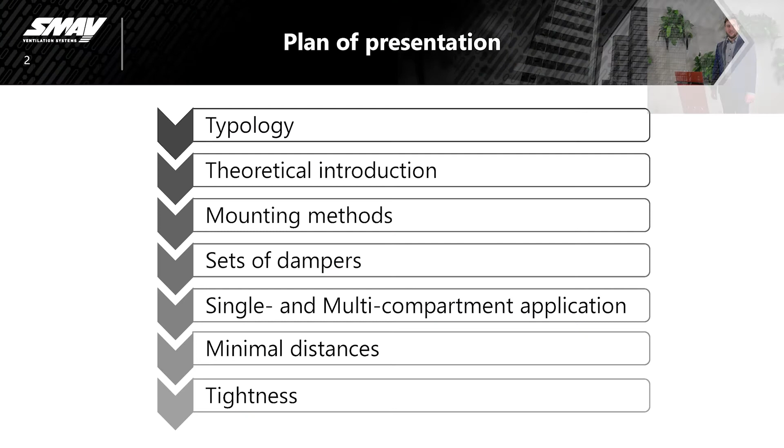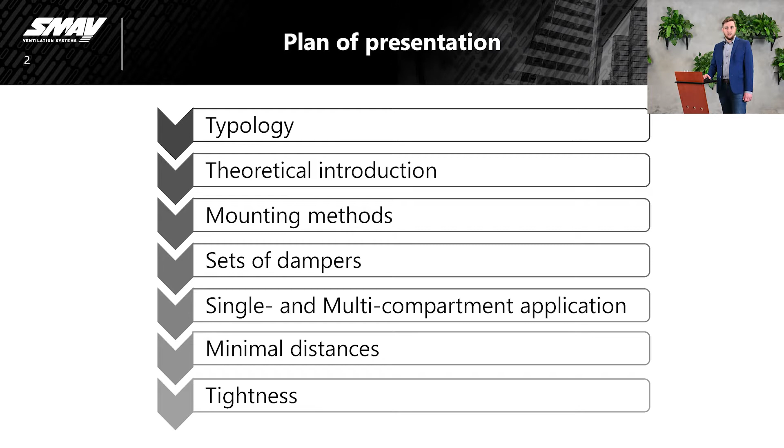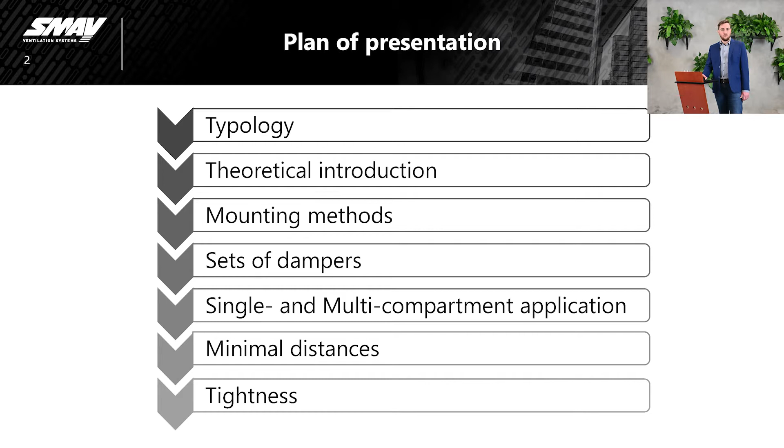I would like to begin by introducing you to the agenda for today's webinar. At the beginning of our meeting, I would like to tell you about the typology of fire dampers. I will tell you about the difference between cut-off fire dampers and smoke control dampers and show you some of our products. Then I will go into the theoretical introduction, so I will talk about documents, standards and fire classification. After that, I will show you mounting methods of Smay fire dampers in different partition types. The next thing I would like to discuss is our sets of fire dampers called battery of dampers. We have certified damper connection solutions, which are incredibly useful for large airflows. I will also raise the subject of application of fire dampers in single or multi-fire compartment systems. After that, I will say some words about minimal distance according to European standard EN 1366 Part 2 and about tightness of fire dampers. At the end, I will show you some of the most common design and mounting mistakes.

Fire protection devices can be divided into two groups: cut-off fire dampers, which are intended for use in household ventilation installations, and smoke control dampers, which are intended for fire ventilation systems. They differ not only in the application, but also in the construction. Cut-off fire dampers intended for HVAC systems are equipped with a thermal release, which will close the damper automatically if the surrounding temperature reaches 72 degrees Celsius. They are designed to protect openings in fire separation walls to stop the fire from spreading. They can also be equipped with actuators and be closed based on FAS system control.

In contrast, dampers for fire ventilation, called smoke control dampers, do not have a thermal release because they are designed to be controlled exclusively by an external fire protection system via a two-way actuator. They can be used to exhaust smoke or provide compensating air during a fire, and their open or closed state depends on the fire scenario.

In our offer we have two types of round cut-off fire dampers, KTM and KTSO, which differ in dimensional range, and rectangular cut-off fire dampers and smoke control dampers. Rectangular dampers for both purposes are available in two versions, one blade KWP and multi-blade WKP.

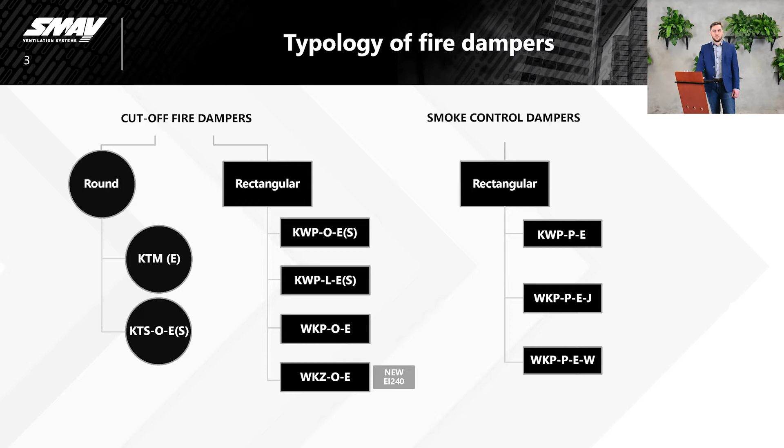Now I would like to say something about the regulations that our fire protection devices are tested according to. The cut-off fire dampers for HVAC systems are regulated and tested according to three standards. EN 1366 Part 2 describes the test method. EN 15650 is the harmonized standard which contains the requirements for this product group and which is the basis for CE marking. And EN 13501 Part 3 specifies classification requirements.

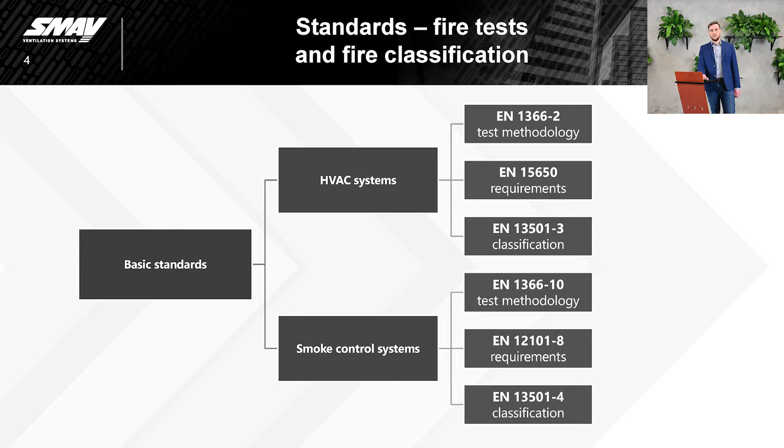Smoke dampers are part of smoke control systems, which are regulated by three standards. EN 1366 Part 10 contains the test methodology and also refers to EN 1366 Part 2, which means that smoke control dampers must meet the same requirements as fire dampers. EN 12101 Part 8 is a harmonized standard for smoke control dampers, in which requirements for this group of products can be found, and thanks to that they can be marked with the CE symbol. And EN 13501 Part 4 specifies classification requirements.

Speaking of classification, on this slideshow we can see examples of fire classifications of two of our products. Based on this, I would like to describe step by step what each symbol stands for.

First of all, letter E stands for fire integrity. It is the ability to resist exposure to fire and not allow it to get to the other side of the material. Letter I stands for insulation, the ability to stop temperature transfer through a fire damper. 120 is the time given in minutes during which the parameters are met.

v_ew means that the damper can be installed directly in the wall. h_ow means that the damper can be installed directly in the ceiling. Next is inside-outside, which means that the criteria are fulfilled no matter from which side the fire acts on the damper.

Letter S means smoke leakage, which is the ability of an element to reduce or eliminate the flow of smoke from one side to the other. 1500 is the value of the under pressure during the test, given in pascals.

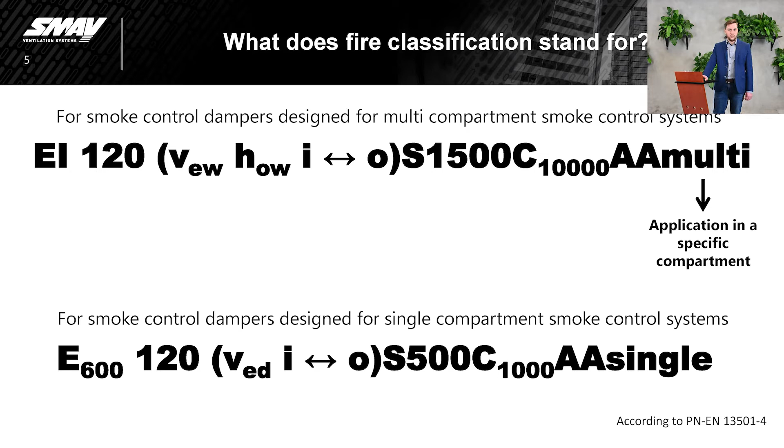Fire classification is quite shorter; it ends on the S parameter. Fire protection devices are tested in 300 pascals of under pressure, and the test involves 300 cycles, but it can also be 1000 cycles.

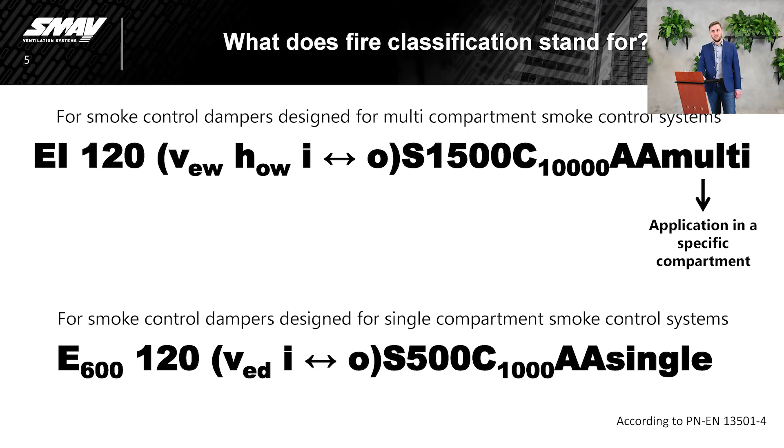In the next few slides, I'd like to show you several possible installation methods of our products. Please note that the specific information about mounting methods for each damper is available on our website in datasheets and installation manuals.

Generally, all fire dampers are intended to be installed in walls and ceilings. However, it is possible to install a fire damper at some distance from the wall. According to the European standard, the maximum distance between a fire damper and partition is 1 meter. Approval for mounting the damper in this configuration must be preceded by an additional test confirming it meets the fire resistance requirements. I will show you an example of such installation later on.

Our company also offers sets of fire dampers called batteries of fire dampers, which are designed for ventilation openings with area over 1.5 square meters. We have products designed for HVAC systems up to 6 square meters and for smoke removal up to 10 square meters. I will talk about them in a later part.

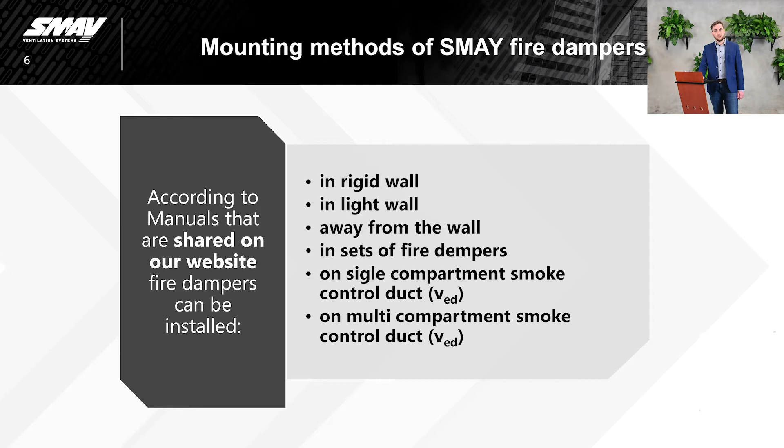We have also products that are intended for use on either single or multi-compartment smoke control ducts. We want to show you several installation methods and also present our products. For this reason, each example includes a different damper for a different method.

First example is KWPO, cut-off fire damper, located in rigid wall. This product is certified for 120 minutes fire resistance when installed in walls which thickness is 115 millimeters or more. This installation method is sealed by using cement, mortar, cement and lime, or concrete. On the right, the technical drawing that can be found in our documents shows the dimensions of the opening prepared in the wall.

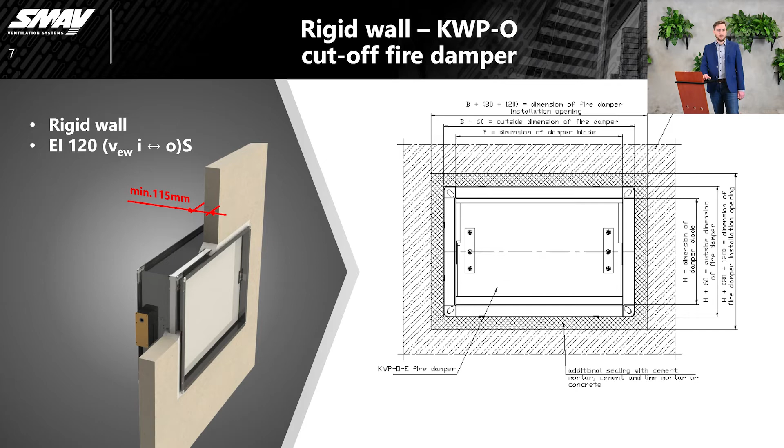Here we have the scheme of the installation of WKPO in rigid wall. Because of its construction, the driving system is localized directly on axis of rotation. It is covered by a special casing that provides easy access for service by protecting the actuator during nominal operating time. The multi-blade fire dampers have non-standard dimensions because of additional 130 mm for actuator casing.

So there are two options to prepare the opening. It can be a customized opening for exact shape or a slightly larger rectangular opening. In the second case, the space below and above the actuator, shown in orange in the drawing, should be filled with the same material that the wall is made of.

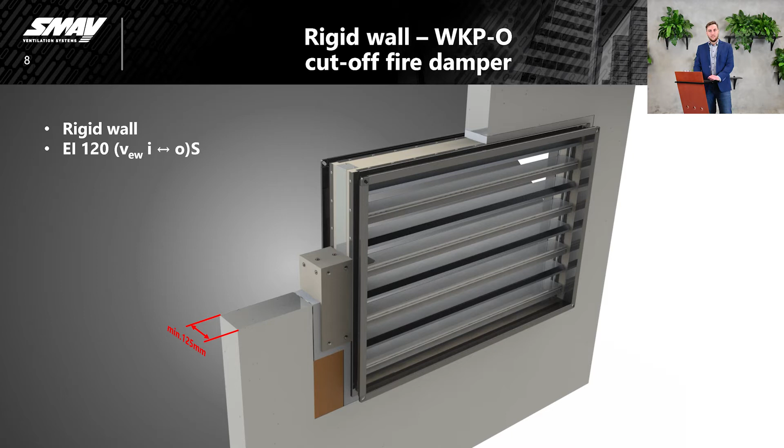WKPO fire damper is certified for 2 hours in walls which thickness is 125 mm or more. This installation method is carried by using mortar. Here we can see the smallest dimensions of WKP smoke control damper, which is 200 by 200 mm. As you can see, the actuator casing is bigger than the damper's external dimensions, but the procedure of installation is exactly the same as in the previous example. Opening can be customized as on the drawing or a rectangular one.

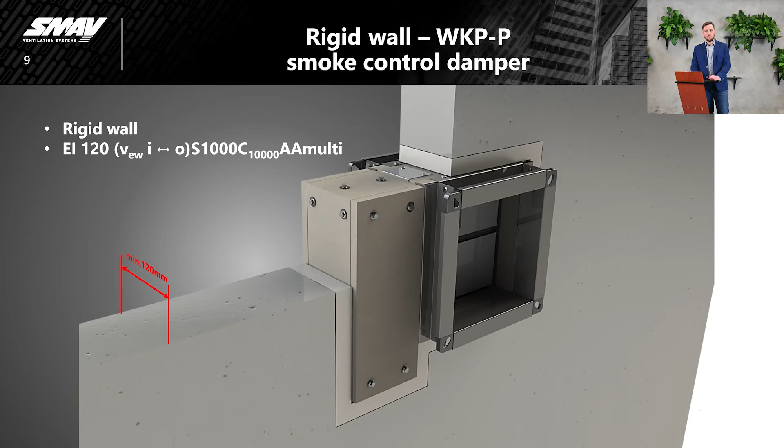Installation method of KTM cut-off fire dampers in light wall. It is really important to properly prepare the wall for this kind of installation. The opening should be matched to the size of the damper according to the guidelines provided in the manual. As you can see in the visualization, steel profiles must be used around the opening to make it stronger and make sure that the fire damper doesn't fall down during a fire.

The opening is additionally covered by 2 layers of gypsum boards, and then the damper is installed on high-density mineral wool. That opening is closed on each side by a flange of 15 mm gypsum board. The wall thickness must meet the requirements of fire resistance class 120 minutes according to EN 1363 Part 1. This standard determines the thickness of steel profiles and the gypsum boards, amount of their layers, and also density of mineral wool to reach the same class of the wall as prepared for fire test.

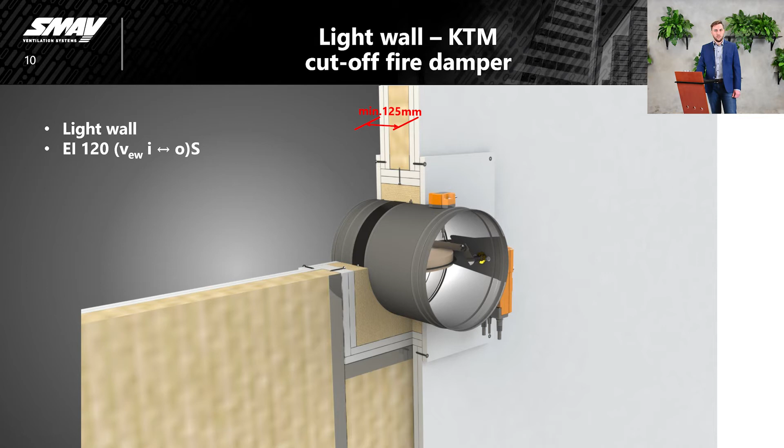Next one is installation method of WKP smoke control damper in light wall. Wall construction is made by the same procedure as the previous one, and there is no possibility to make a customized opening for this case, so it has to stay rectangular, and free spaces should be filled with mineral wool.

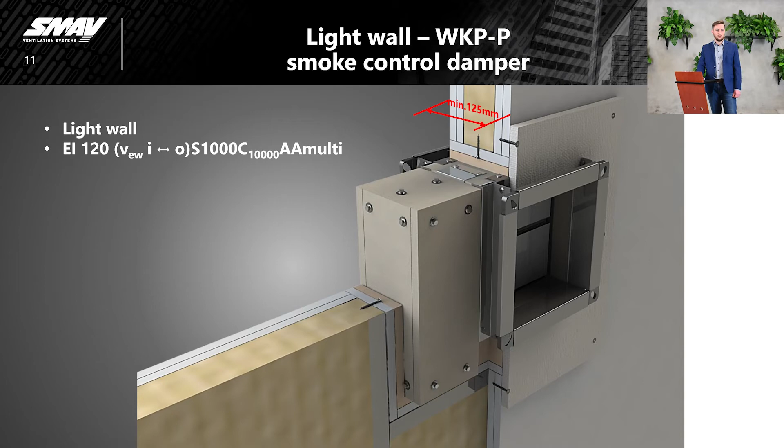Installation method of KWPP smoke control dampers in ceiling. This method is quite similar to installation in rigid wall, but additionally we recommend using supporters that hold the damper until mortar hardens. As you can see, the minimum thickness of ceiling is 150 mm, and the fire resistance class of KWPP is 120 minutes.

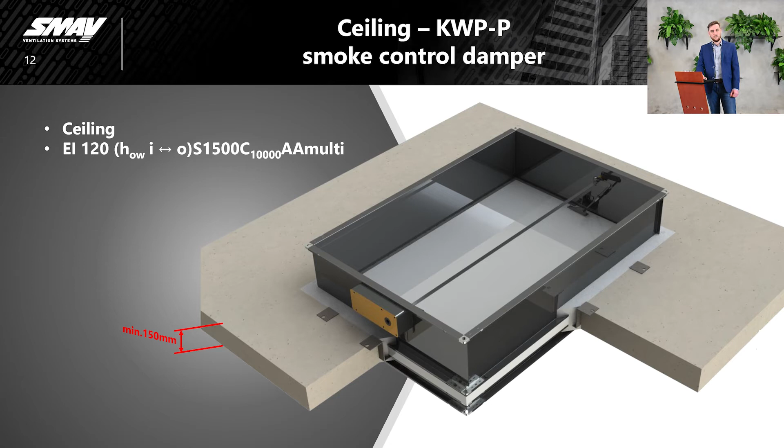Installation method of KWPL cut-off fire dampers beyond a rigid wall. This installation is made in ProMat technology. The part of installation that is between the fire damper and rigid wall is made as a multi-compartment smoke control duct. More details you can find in installation methods shared on our website.

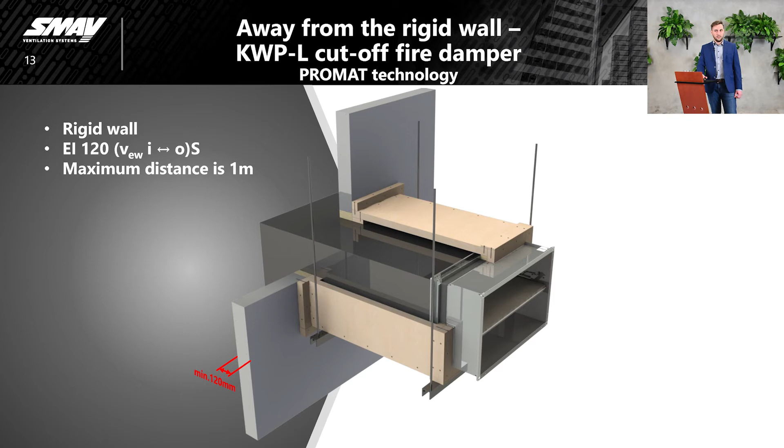One more thing, I would like to emphasize that the steel ventilation duct cannot be a standard HVAC duct. It must be a duct intended for use in a single compartment smoke control duct.

Installation method of KTS fire dampers beyond the rigid wall. In this case, we recommend using wool as insulation material because it is needed to use material that can bend over the duct. For this type of fire dampers, fire classification depends on installation method. As you can see, at a distance of 1 meter from the rigid wall, they have a classification of 90 minutes, while the KTS mounted directly in the rigid wall has a classification of 120 minutes.

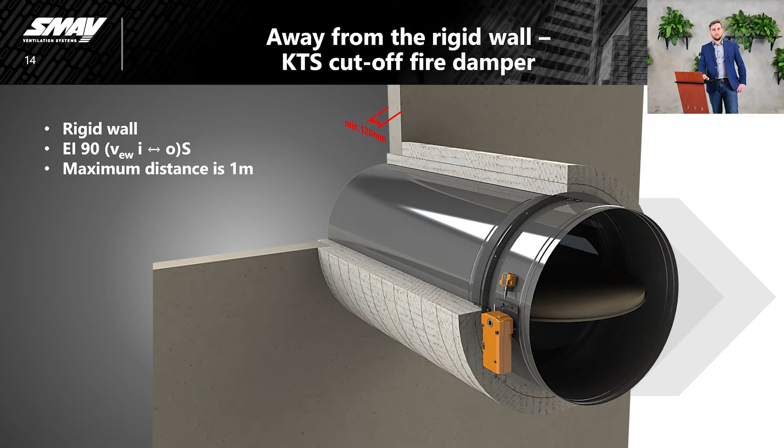Installation method of KWP-P smoke control dampers on single compartment smoke control duct. The VED indication in the classification code for single compartment systems means the product is intended for use in a duct that goes through vertical partitions. It doesn't specify exactly where fire dampers should be installed. As you can see, it can be at the end of the duct or even on top of the duct, mounted either vertically or horizontally in this case.

Installation method of KWP-P fire dampers on single compartment smoke control duct. This type of damper is intended for use in multi-compartment smoke control duct, but it is also acceptable to use it on single compartment smoke control duct, because multi is a higher class than single.

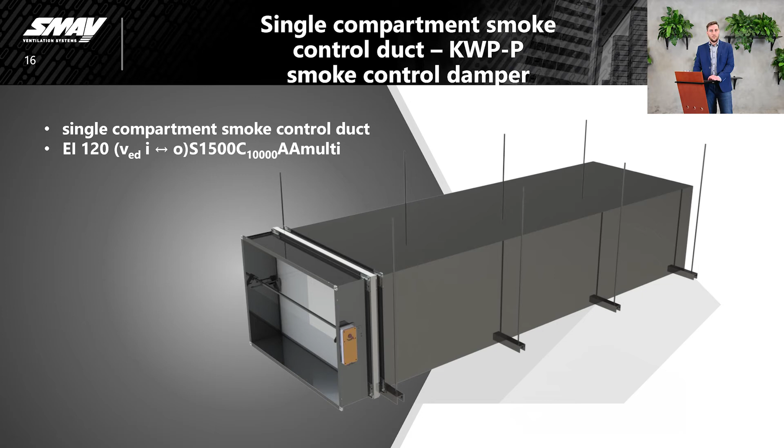Here we can see the installation method of KWP-P fire dampers on multi-compartment smoke control duct. There is a significant difference compared to single compartment smoke control duct. According to EN 13501 Part 4, VED indication in multi-compartment systems means the orientation of the smoke control damper. As you can see in these two examples, the direction of the duct doesn't matter — in both cases, the fire damper is installed vertically.

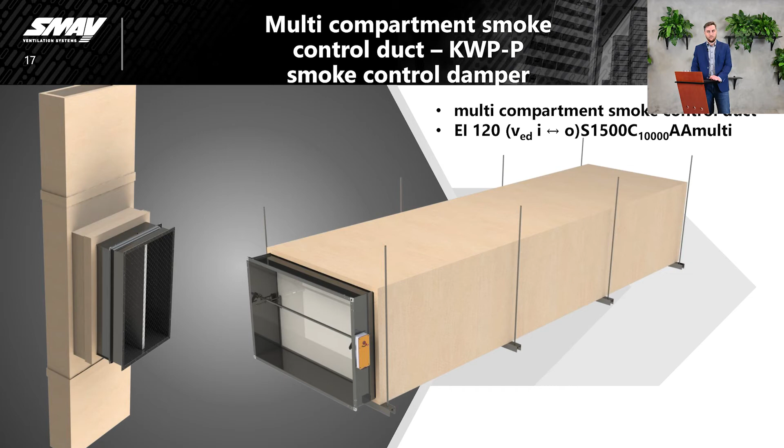As I mentioned before, our company also offers sets of fire dampers, intended for ventilation openings with an area over 1.5 square meters. Sets of KWP-O cut-off fire dampers intended for HVAC systems are certified according to a harmonized standard, with a maximum area of 6 square meters. Batteries of KWP-P for fire ventilation systems have a separate document called National Technical Assessment, which allows us to place them on the market, with a maximum area of 10 square meters.

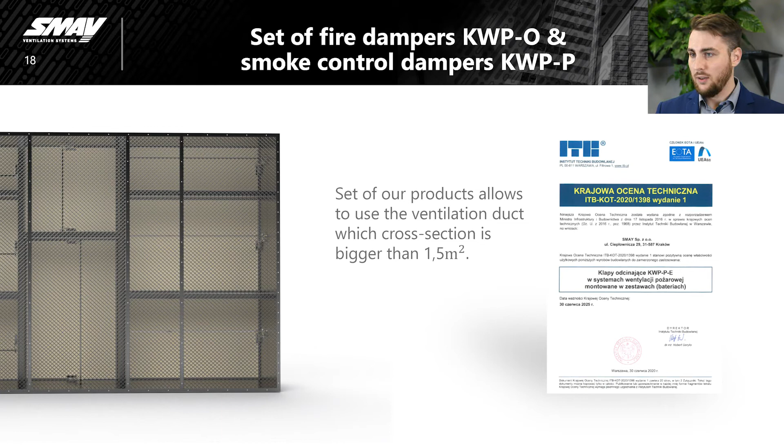How to properly specify a set of fire dampers? Basically, there are 3 steps we have to follow. Firstly, we have to define the type of damper, which depends on the system — as I said before, KWP-O are for HVAC systems and KWP-P are for smoke control systems. Secondly, we have to define the dimensions of the set. It is measured as the internal cross-section of the connection duct, so connection flanges are not taken into account.

The next step is to check if the wall type meets the requirements of the installation. It can be mounted only on a rigid wall or in a ventilation shaft, and should have appropriate thickness. All details are included in the installation manual in batteries.

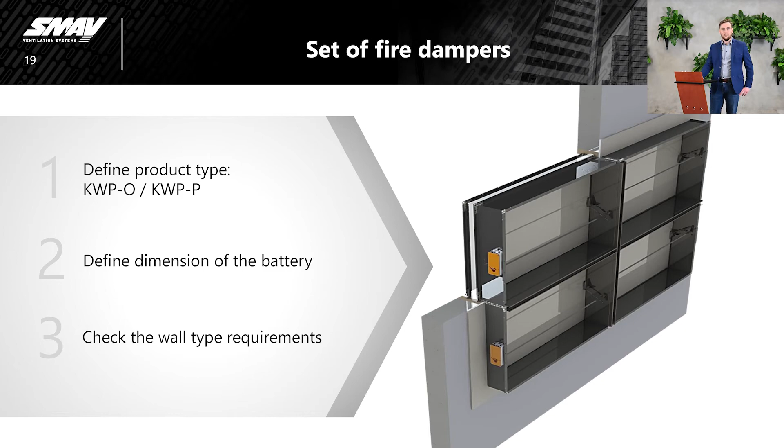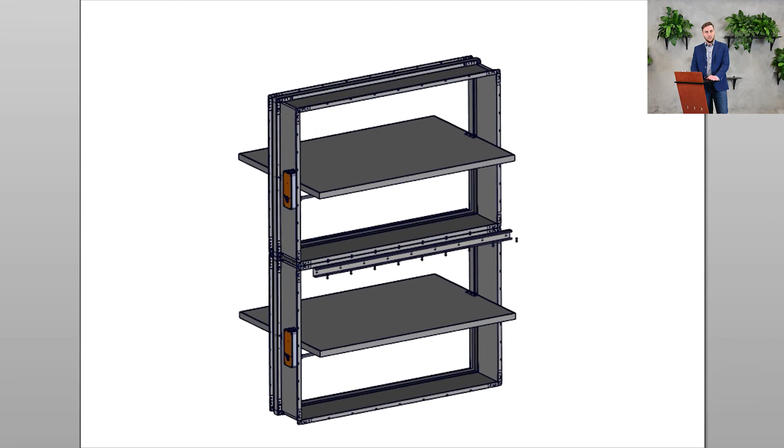Now I will show you a video demonstrating the proper way to install a fire damper set. It is very important that a set of dampers reaches the same parameters of fire integrity and fire insulation that are declared for fire dampers by the manufacturer. For this reason, connections between dampers must be sealed using mineral wool and an intumescent gasket, and also steel connectors that go onto the inside of the fire damper flanges.

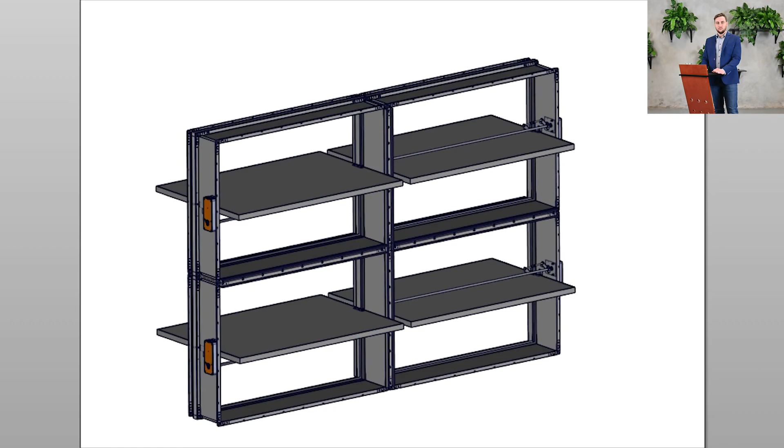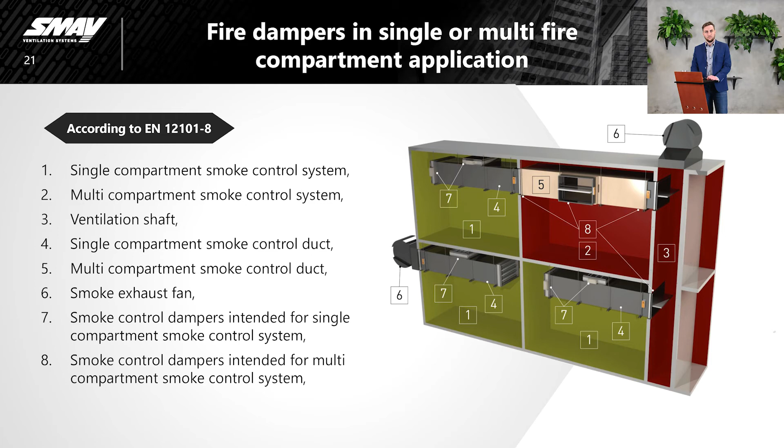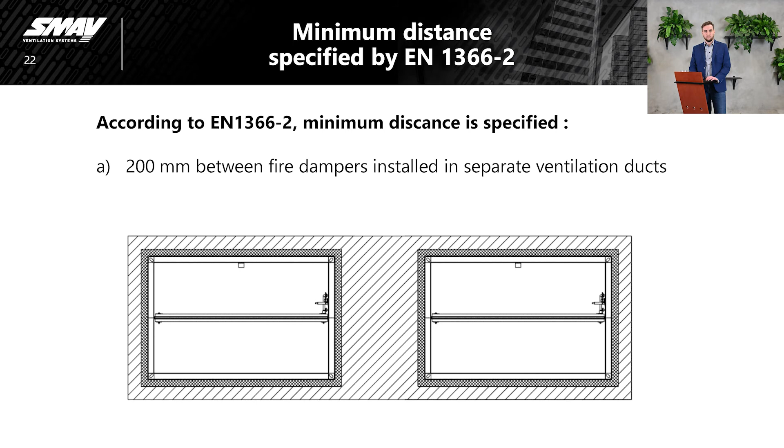The standard EN 1366 Part 2 specifies the procedure for a fire test and includes recommendations for use in practice in a building application. As a company that provides fire protection equipment, we get a lot of questions about minimum distances for our fire dampers. There is no difference between fire dampers in the market tested according to EN 1366 Part 2. The standard says the minimum distance between fire dampers for two separate ventilation systems should be 200 millimeters or more, and in the case of distance between a fire damper and building structure, it should be 75 millimeters or more.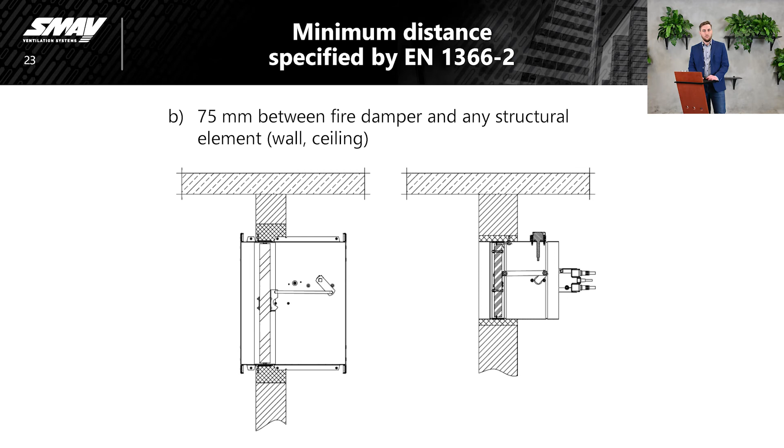Please remember these distances are established for safety, which includes proper installation of fire dampers and maintaining proper construction strength of the partition. There is a possibility to install fire dampers at a smaller distance than the standard specifies, but it has to be preceded by fire tests which approve the fire classification when a smaller distance is used. For example, our company provides KTM dampers which positively passed fire tests and can be installed at 10 millimeters between each other, and also 10 millimeters between the fire damper and building structure. But this is the only exception — distances between our other fire dampers are determined by the standard I mentioned before.

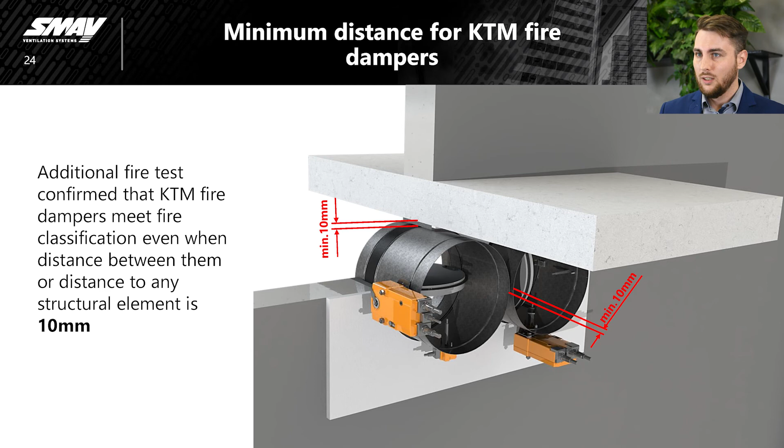Tightness of fire dampers is becoming a more and more popular topic. High tightness of dampers brings benefits by minimizing pressure losses in the ventilation system. In addition, the use of tight devices gives the possibility of operating at lower pressure, which allows reducing operating costs related to energy consumption.

The basic parameter that describes the tightness of the fire damper is the S parameter. Additionally, according to EN 1751, we can classify products in two separate parameters: casing tightness, which ranges from A to D, and shut-off tightness, with a range from 1 to 4. Casing tightness of our products is mostly declared as C. These parameters depend, of course, on the type of fire damper, their dimensions, and shape.

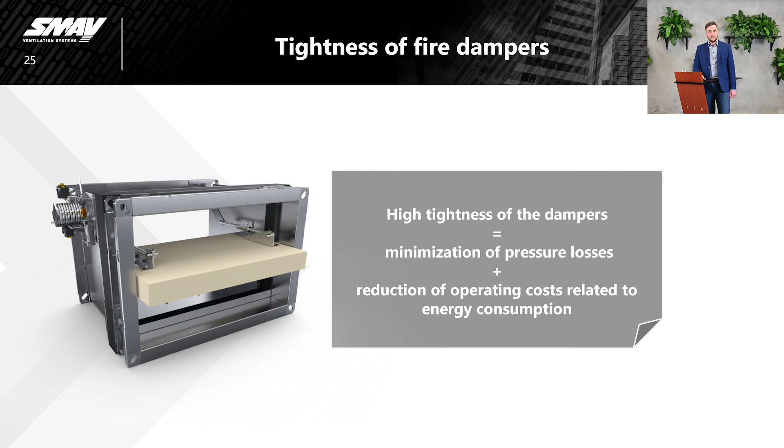We not only deliver fire protection equipment, but also provide technical and service support. Our experience over the years has shown that the design and installation of dampers causes several problems that keep repeating from time to time. I would like to point out the things you should pay attention to and explain why correct execution is so important.

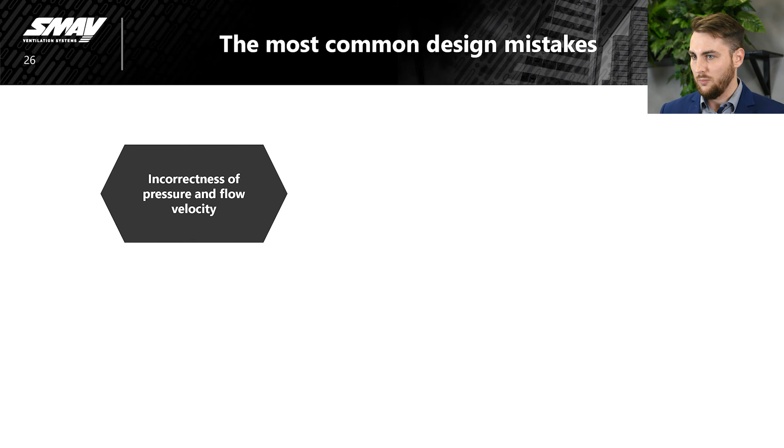First of all, inappropriate selection of damper for pressure and flow velocity of medium. I have mentioned before that cut-off fire dampers are tested at 300 pascals of under-pressure, while smoke control dampers are tested at 1500 pascals. We have to take this into consideration, because fire dampers for HVAC systems might not be able to meet requirements that come from smoke control systems. The next issue is velocity of the medium - it should stay below 10 meters per second.

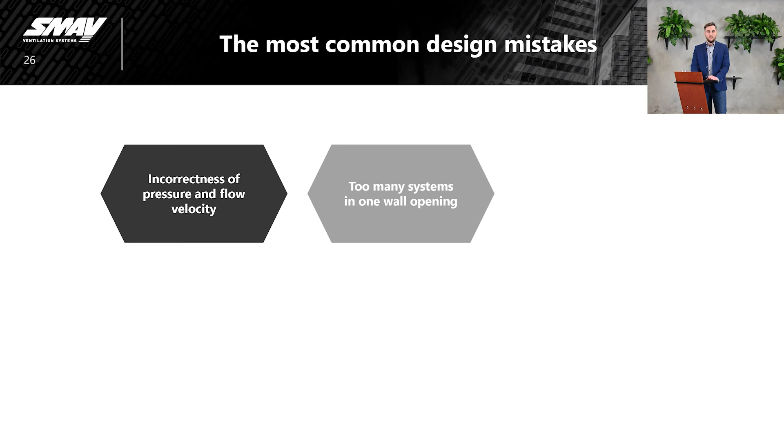Second issue is mounting too many installations in the wall opening. We are conscious that nowadays, due to safety and comfort, there are a lot of installations in building structures, and for this reason distances between them are decreased to a minimum to provide as much useful space as possible. Therefore, it is very common to make changes on site that are not included in the design. It is very important that the installation is physically done as designed, because not maintaining the proper distances may be a reason for not recognizing the classification of the fire damper.

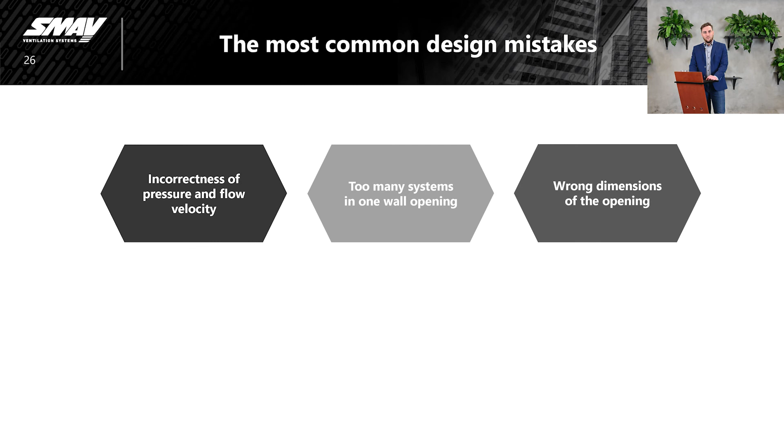The next thing is wrong dimensions of the opening. During installation, it is crucial to follow producer manuals. Otherwise, fire dampers might not meet requirements and their fire resistance can be different than declared. If the opening is too small, there is no problem to make it bigger to the right dimensions. If it is too big, you can fill the space, as we have shown talking about installation methods.

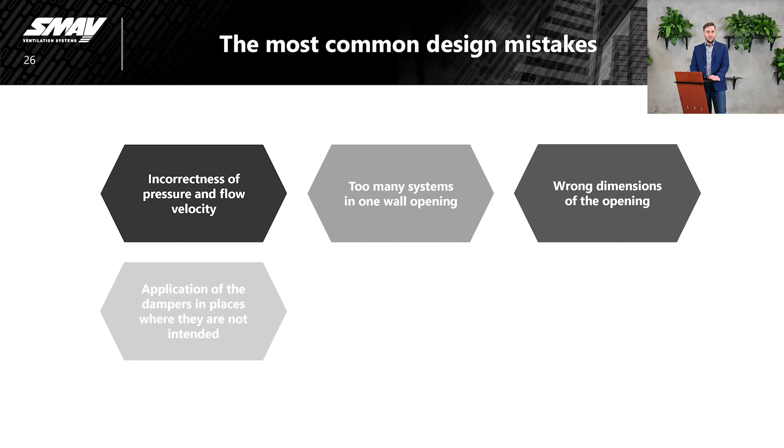Application of dampers in places where they are not intended for, for instance away from building partitions. Please remember that it is the designer's responsibility to verify if the fire damper can be installed in the way he or she wants. There are a lot of problems when a contractor or company realizes that the fire damper doesn't have the installation method and fire classification as it was designed.

Wrong selection of the damper for the system type which they are intended for. There are a lot of projects where KWPO cut-off fire dampers, which are intended for HVAC systems, are used in mixed systems, meaning day-by-day ventilation and smoke control systems simultaneously. In this kind of installation, the use of a KWPP smoke control damper is necessary. They are intended for smoke control systems, but as I mentioned before, they also have to meet the requirements set for cut-off fire dampers.

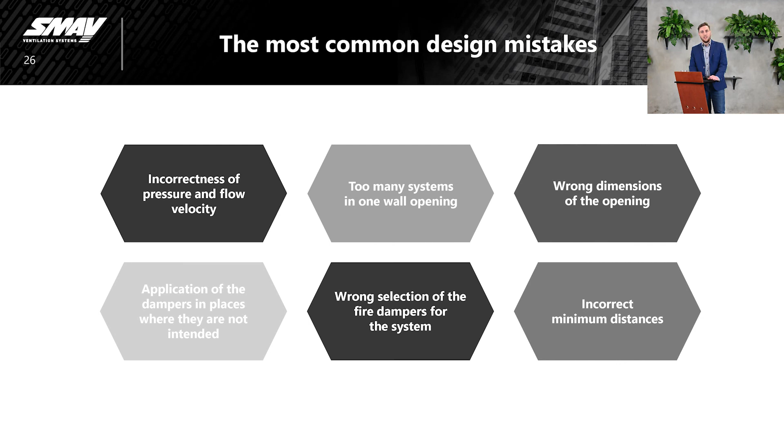And the last one: incorrect minimum distances. If we do not keep minimal distances during installation of fire dampers, they might not meet the requirements of the application, and their fire classification might be different than declared by the procedure.

In our documents, you will find recommended installation methods which have been confirmed by fire tests we have carried out. However, we are aware that the site situation may differ slightly from our drawings presented in the instructions. You can count on us and our fire testing experience. We share our ideas and advice because we believe there is always a way out of a difficult situation.

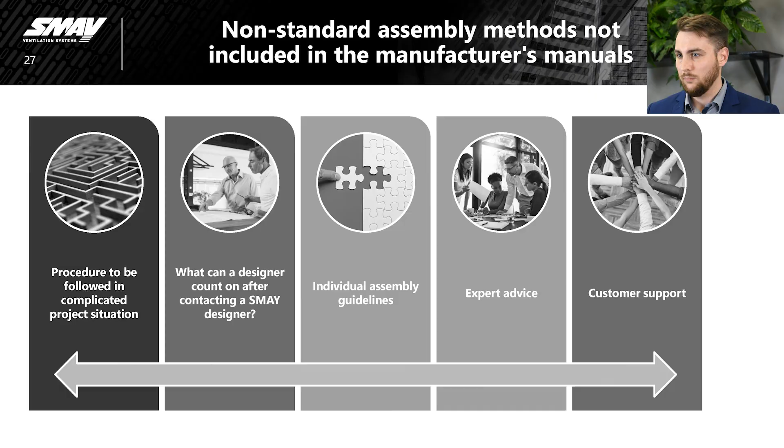I am well aware that there is still a lot to be said on this subject. I believe our technical support team have been answering your questions during my presentation. If you have additional questions, doubts, or need a selection of devices, I invite you to contact us. Our team is always ready to help you.